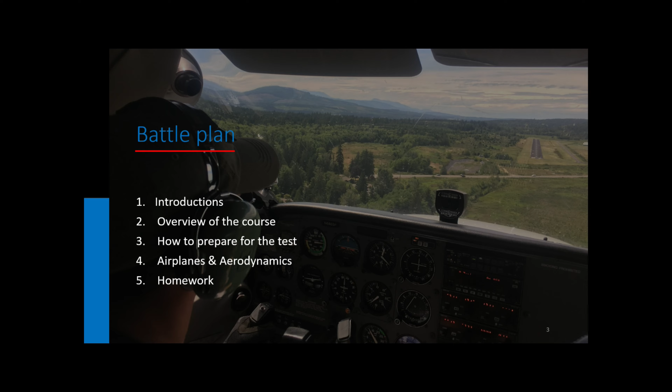This is how I like to run my lessons. We start off with the tasks, conditions, and standards, basically what we're going to be covering for the day. We get into emergency procedures. We do a student report of the day, like a plane of the day, a subsystem deep dive, or a topic deep dive. We get into the ground school topic of the day, and we do a debrief, 5-minute recap from memory, and then a multiple choice quiz to emulate the FAA written exam.

The private pilot certificate is a lot like your driver's license. You can carry passengers and baggage, but you can't do it for hire. You can also get a recreational pilot certificate. It is upgradable to a private pilot certificate, but there are some restrictions.

Let's talk about studying for the exam. First and foremost, you should go in knowing your stuff. Be a subject matter expert on the topics. You should be constantly testing yourself, basically doing a short quiz every single day to make sure that you are ready for the exam. You should go back and review any missed questions and turn your weaknesses into your strengths. And at the end of every lesson, you should do an active recall session where you put aside your notes and you write down from memory everything you can remember from the lesson.

Let's talk about some requirements for certification and recent experience. First of all, you must be 17 years old to get your private pilot certificate. You have to have a working knowledge of the English language, so read, speak, and write the English language. You must receive a logbook endorsement from your instructor saying that you're ready for the exam. You need to meet the aeronautical experience requirements, pass a practical test, and hold one of these certificates.

To be a pilot in command and to carry passengers in the day, you must log 3 takeoffs and landings within the preceding 90 days, and if you're flying a tailwheel aircraft, those 3 takeoffs and landings must be to a full stop. If you want to carry passengers at night, you must also do 3 takeoffs and landings at night to a full stop.

To act as a pilot in command, you must go back and receive a biennial flight review every 24 calendar months. This consists of 1 hour of flight and 1 hour of ground training to make sure that you are staying up to date with all the rules and regulations and anything new in the aviation community. Another way to meet this requirement is to get a new rating. You can get your instrument rating or commercial rating, and this essentially resets your 24 calendar month clock.

Another way of completing the 2-year flight review is to complete a level of the FAA Wings program. This consists of a few ground modules. Then you go up with an instructor to do the flight portion, and then you get a set of wings like these.

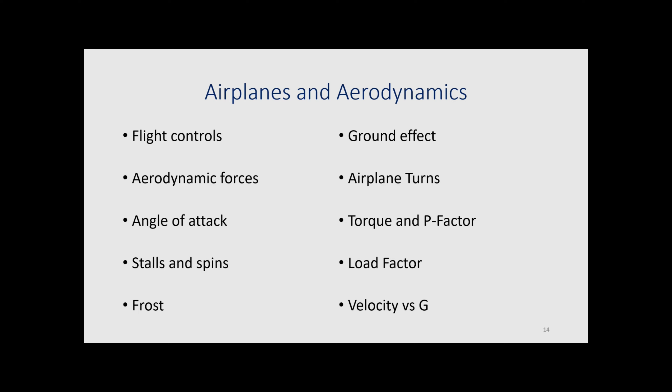The first few lessons are going to cover airplanes and aerodynamics. We'll talk about flight controls, aerodynamic forces, angle of attack, stalls and spins, frost, ground effect, airplane turns, torque and P factor, load factor, and velocity versus G. Let's get into the flight controls.

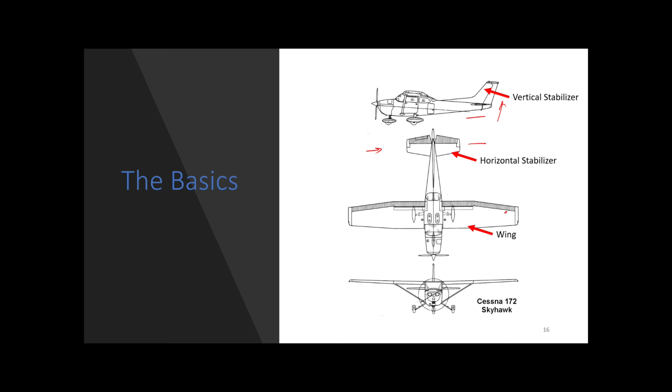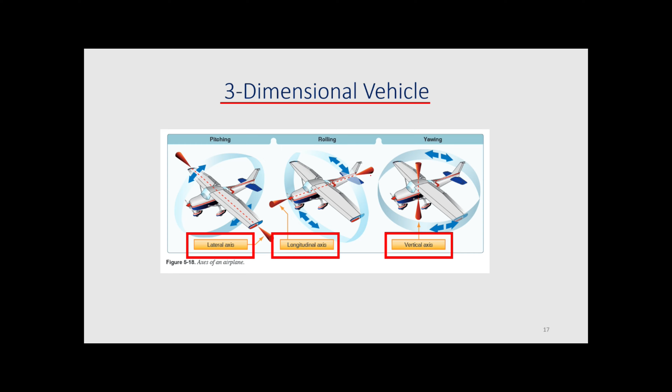Here are the basics. On the tail of the aircraft, we have the vertical stabilizer. We also have the horizontal stabilizer. You can tell which is which because the vertical stabilizer is vertical and the horizontal stabilizer is horizontal. And this big guy here is called the wing. Our aircraft is a 3-dimensional vehicle. The 3 axes that we rotate about are the lateral axis going from wingtip to wingtip, the longitudinal axis going from nose to tail, and the easy one, the vertical axis.

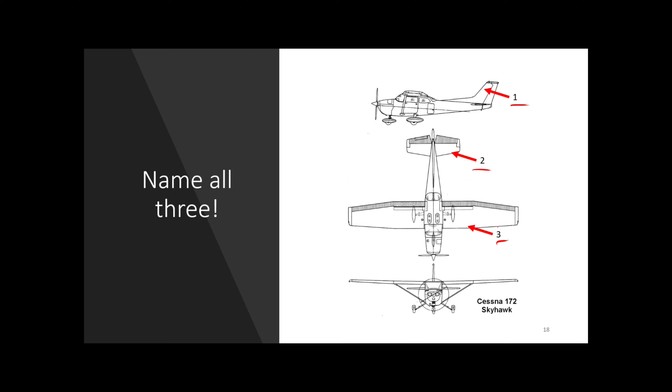Let's review. Name all 3. What's number 1? That's the vertical stabilizer. Number 2 is the horizontal stabilizer. And number 3 is the wing. All right. And what are the 3 axes of our aircraft? Wingtip to wingtip, that's the lateral axis. Nose to tail, the longitudinal axis, and from floor to ceiling, that's the vertical axis.

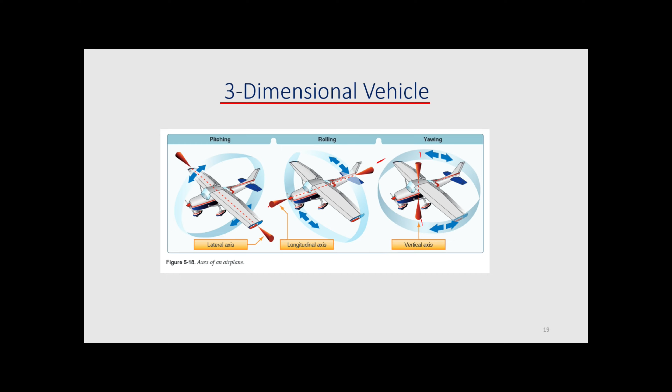Now let's talk about how we move about those axes. To pitch about the lateral axis, we pull back or push forward on the stick, and this actuates the elevator. This pitches us about the lateral axis. We roll about the longitudinal axis by deflecting our stick left and right.

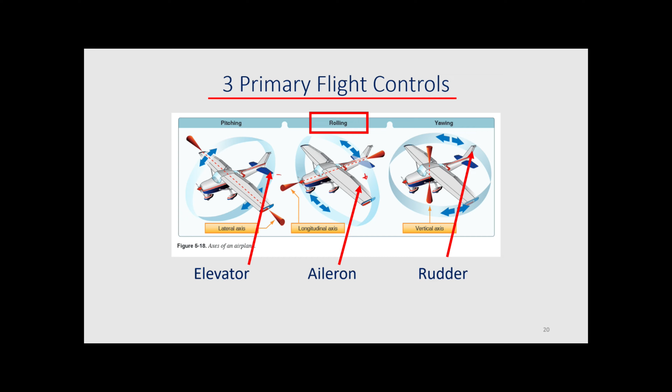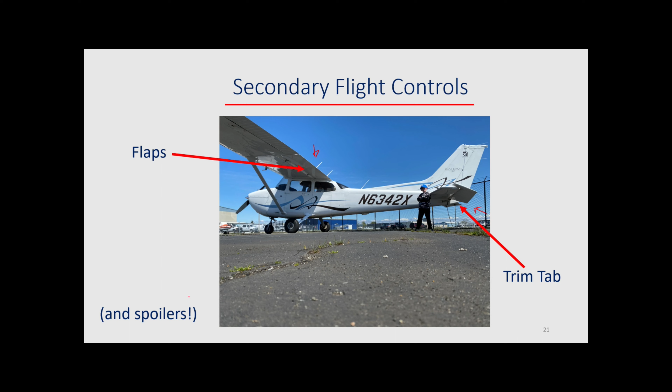This actuates these ailerons, and they roll us about the longitudinal axis. Our feet press against the rudder pedals, and this actuates the rudder, and this yaws us about the vertical axis. These are the secondary flight controls, the flaps, and the trim tab. Some aircraft have spoilers, but spoiler alert, we don't in the 172.

What are the 3 primary flight controls? We pitch about the lateral axis using the elevator. We roll about the longitudinal axis using the aileron. And we yaw about the vertical axis using the rudder.

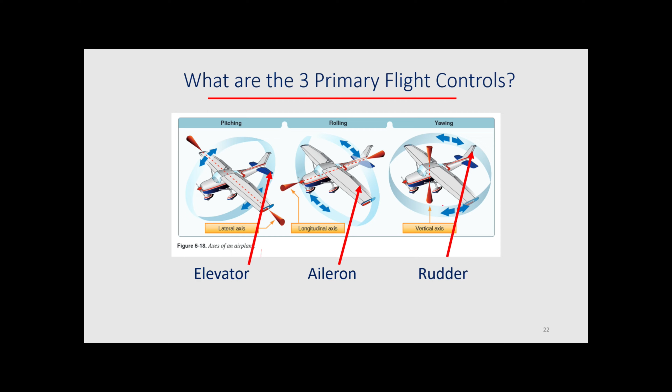Nice. Let's talk about the purpose of the trim tab. The trim tab is used to counteract aerodynamic forces on the elevator. This relieves the pilot's workload during continuous maneuvers, and it allows for hands-off flight. Remember, pitch, power, and trim. We set our pitch using our stick, we set the power using the throttle, and then we trim off control pressures to fly hands off.

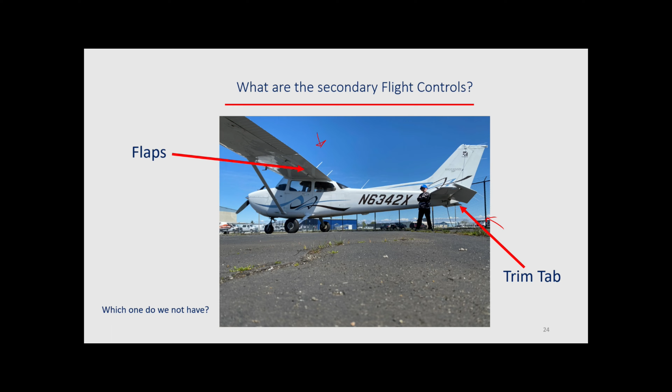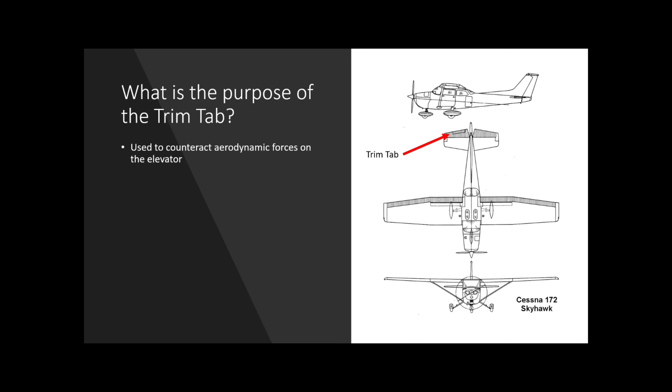What are the secondary flight controls? These panels on the inboard side of the wing are the flaps, and over here on the tail, that's the trim tab. And which one do we not have in the 172? The spoilers, that's right. What is the purpose of the trim tab? The trim tab is used to counteract aerodynamic forces on the elevator. This relieves the pilot's workload during continuous maneuvers, and it allows for hands-off flight.

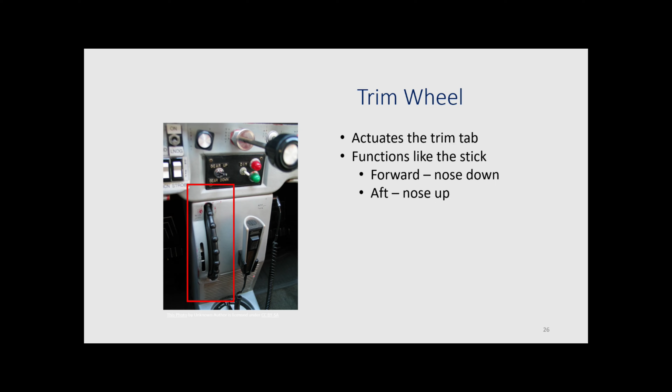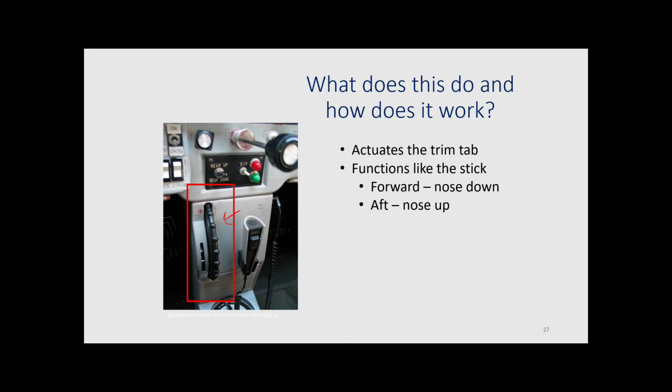This is the trim wheel. This actuates the trim tab, and it functions a lot like the stick. We roll forward to nose down, and we roll aft for nose up. So in your own words, what does this do, and how does it work? That actuates the trim tab. It functions like the stick, forward for nose down, aft for nose up.

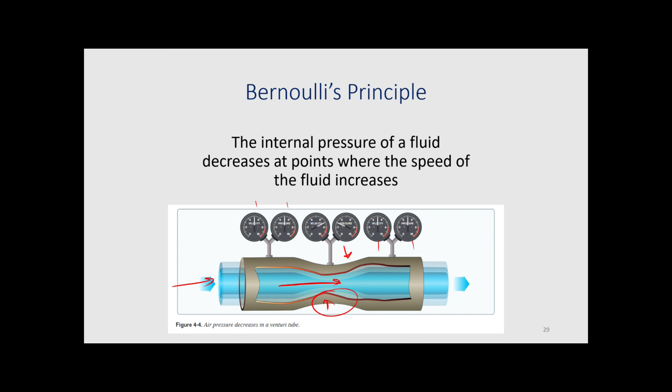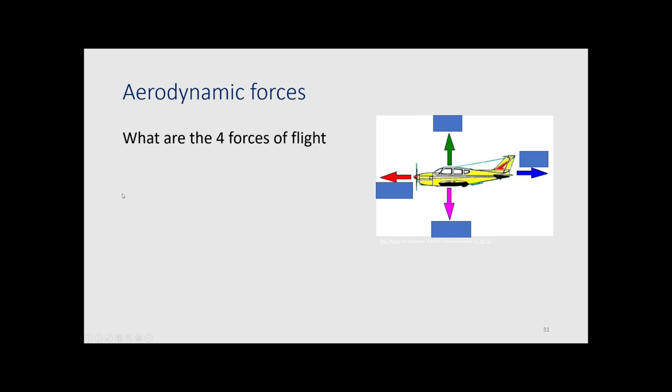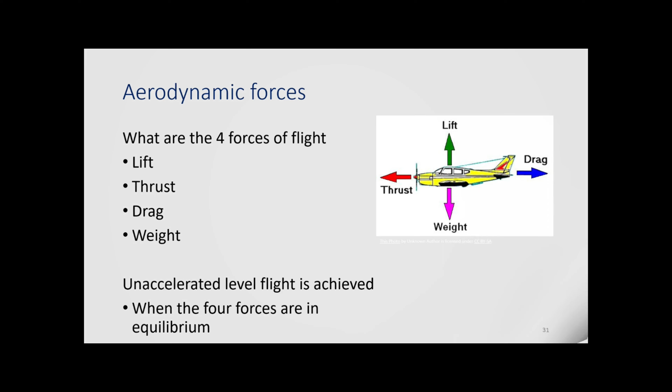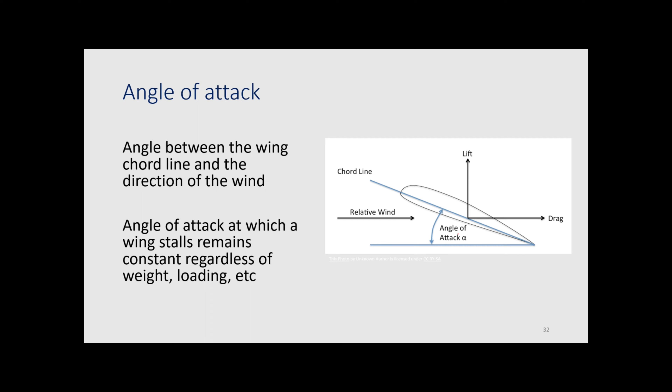The angle of attack is the angle between the wing chord line and the direction of the wind. The angle of attack at which a wing stalls remains constant, regardless of weight or loading. So this angle right here is the angle of attack. An airplane can stall at any airspeed and in any flight attitude. It's all about exceeding that critical angle of attack. An airplane spins when one wing is less stalled than the other, and to spin, an airplane must be stalled.

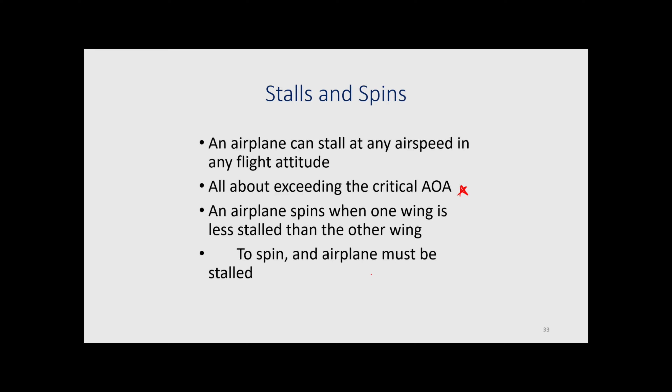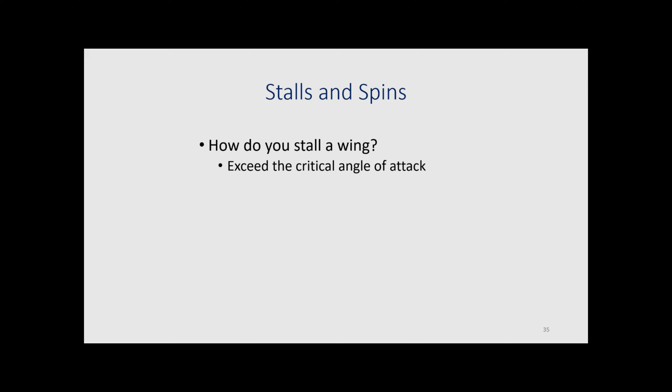So the angle between the wing chord line and the direction of the wind is called the angle of attack. How do you stall a wing? You exceed the critical angle of attack. To spin, an airplane must be stalled. That's right. All right, let's take 5 minutes now, pause the video, and jot down as much as you can remember from the lesson. And then we'll get into our quiz. Ready? Pause.

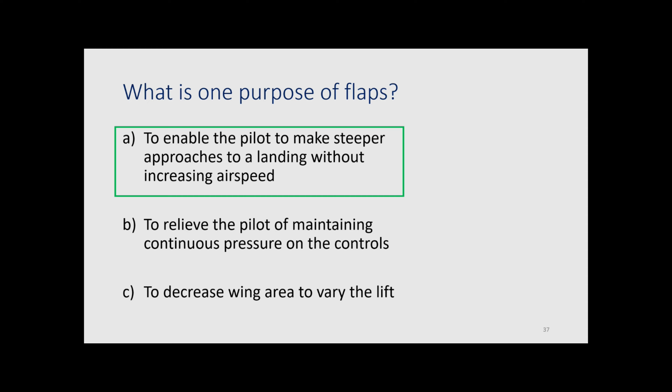Let's do our quiz. What is one purpose of flaps? To enable the pilot to make steeper approaches to a landing without increasing airspeed. What is the purpose of the rudder on an airplane? To control yaw. Which is not a primary flight control? The flaps. The elevator controls movement around which axis? The lateral axis.

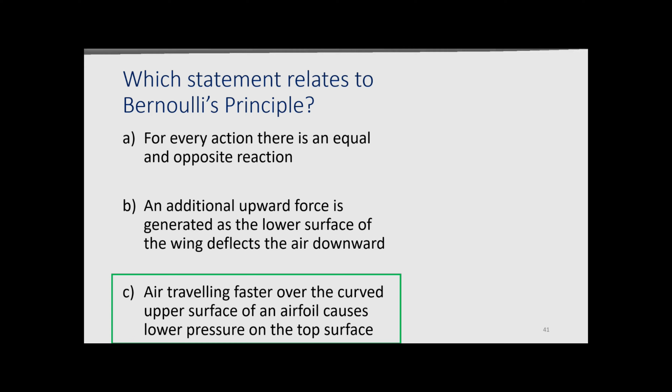Which statement relates to Bernoulli's principle? Air traveling faster over the curved upper surface of an airfoil causes lower pressure on the top surface. All right, here's your homework. Read and report on adverse yaw, Chapter 3 in the Airplane Flying Handbook. You should read the Airplane Flying Handbook, Chapters 1 through 3, and the Pilot's Handbook of Aeronautical Knowledge, and test yourself. Do at least 5 questions a day.